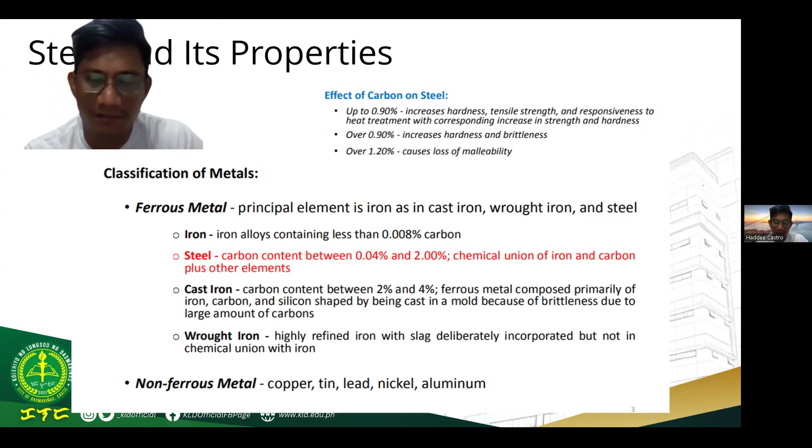As you can see from the first slide, steel design is governed by engineering principles that ensure structures can safely resist applied loads throughout the service life. These principles include understanding load behavior, material strength, failure modes, and safety factors.

As future engineers, we do not design structures to fail. Instead, we design them with sufficient margin so that even under extreme conditions, collapse is prevented.

So, production of steel. It has history too. Steel production involves processes such as blast furnace and electric arc furnace methods. These processes control the chemical composition and mechanical properties of steel. Understanding steel production helps engineers appreciate why different grades of steel behave differently and why specifications must be strictly followed in design and construction.

History of steel production: during 3000 BC, iron implements were used in Egypt. Then in 1000 BC, hardening iron weapons by heat treatment was known to the Greeks. It was used for weapons, like a blacksmith.

As iron ore and charcoal are heated in a forge or furnace, the ore is reduced to a sponge of metallic iron filled with slag composed of metallic impurities and charcoal ash. As the sponge of iron is removed from the furnace, still incandescent, it is beaten by heavy sledges to drive out the slag and to weld and consolidate the iron.

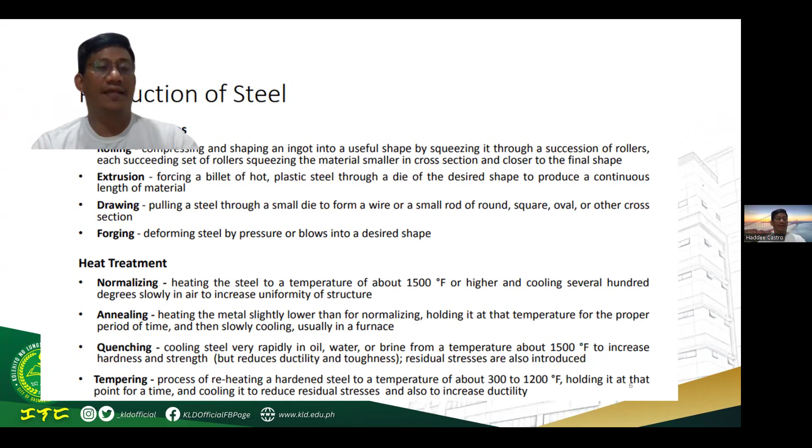There are many kinds of steel production. There's the finishing process, which includes rolling, extrusion, drawing, and forging. There's also heat treatment: normalizing, annealing, quenching, and tempering. These are self-explanatory.

Here are the mechanical properties of steel. Steel is an alloy primarily composed of iron and carbon, with other elements added to improve strength, ductility, and durability. One of steel's most important properties is high strength to weight ratio, which allows engineers to design lighter yet stronger structures.

Steel is very ductile, meaning it can undergo large deformations before failure. That's why we have what is called yielding strength. Once it goes beyond that, failure occurs. This is an essential property providing warning before collapse.

Property number one of steel is elasticity. It is the capability of the material to return to its original form after the loads are removed. We also have the modulus of elasticity of steel, which is the slope of the stress-strain diagram in the region where stress is proportional to strain.

Proportional limit is the stress at the limit of linear proportionality, generally determined by the stress corresponding to a permanent strain of 0.01%. When we say strain, from your strength of materials, strain is the ratio of the deformation over the original form.

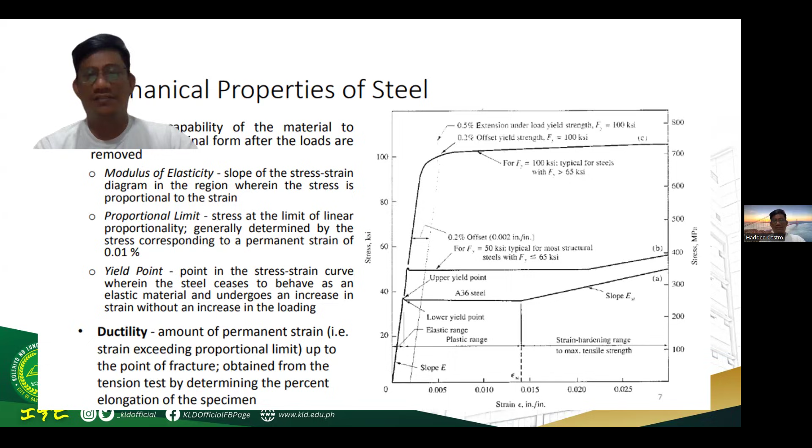The proportional limit should only have a stress limit of 0.01 for steel. Then ductility is the amount of permanent strain up to the point of fracture, obtained from the tension test by determining the percent elongation of the specimen. So there we see Fy and Fu, where Fu is the tensile strength.

There's also fatigue, which is the process of gradual or progressive fracture of the crystal under repeated stress. Then impact is the resistance of material to failure due to brittleness under service load. And then flow or creep is the very slow flow of material at elevated temperatures under sustained stresses.

And then there's corrosion and wear. This is the number one enemy of steel. It can be caused by moisture, water immersion, soil contact, electrolytic process, chemicals, and other factors besides water.

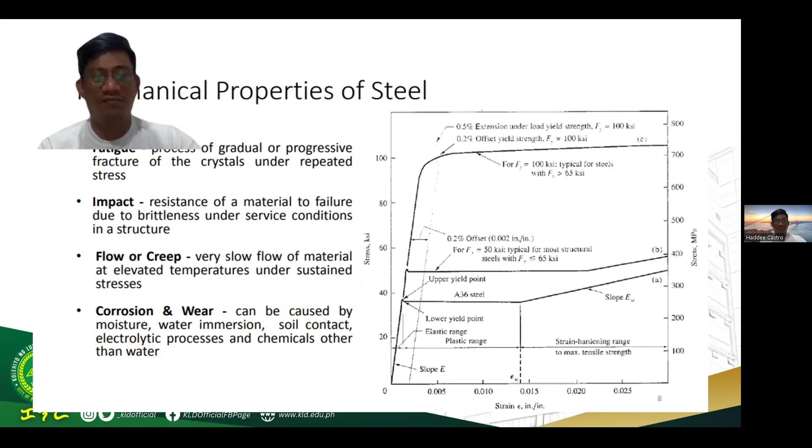This is the steel classification for structural use. Carbon steel has a yield strength of 32 to 55 KSI. These include A36, A53, A500, and so on.

We also have high strength low alloy steel, which is 40 to 70 KSI or 275 to 480 megapascal. These include A242, A441, A572, A588, or the grade 50 steels.

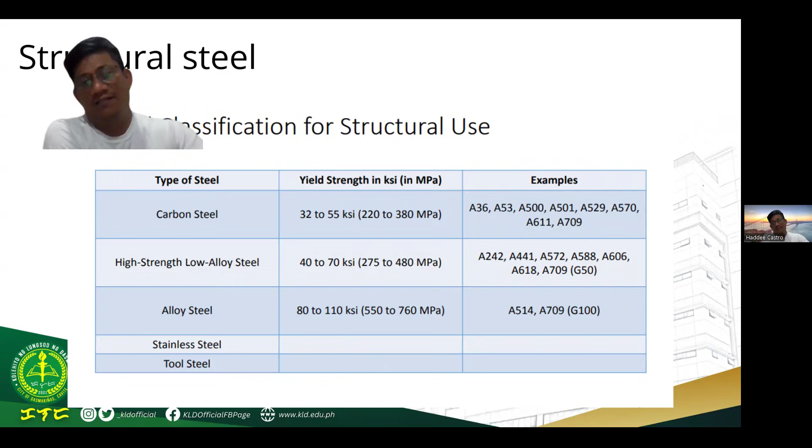And then alloy steel is 80 to 110 KSI, 550 to 760 megapascal. This is the grade 100. And then there's stainless steel and tool steel.

Same as the previous slide, this is the structural steel property, taken from ASTM.

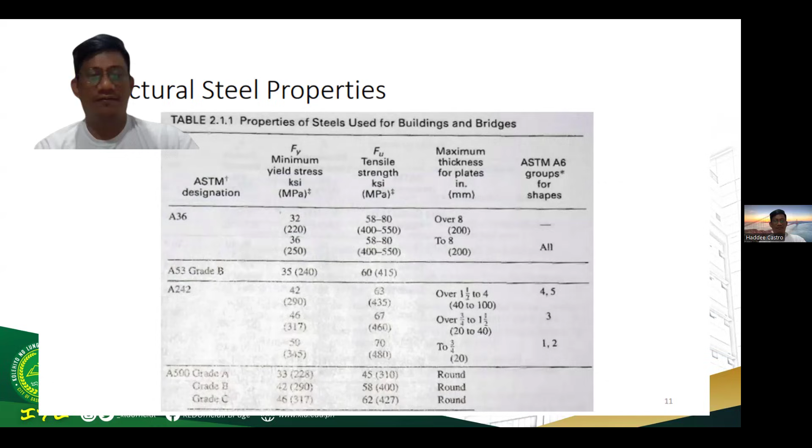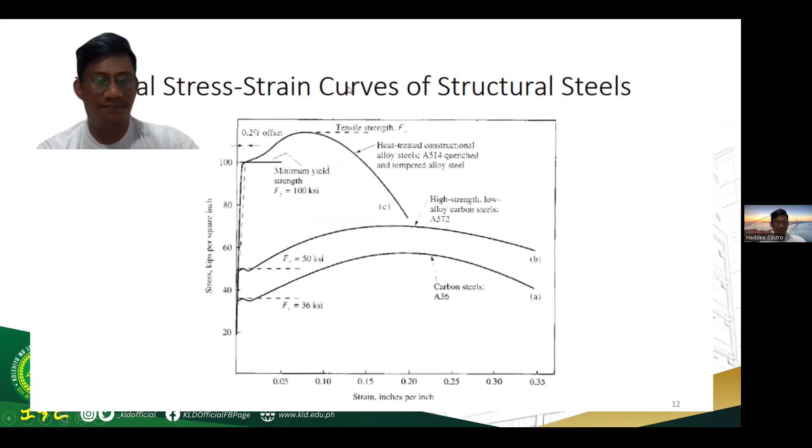And then the typical stress-strain curves of structural steel. As you can see, it has a minimum yield strength of 100 KSI.

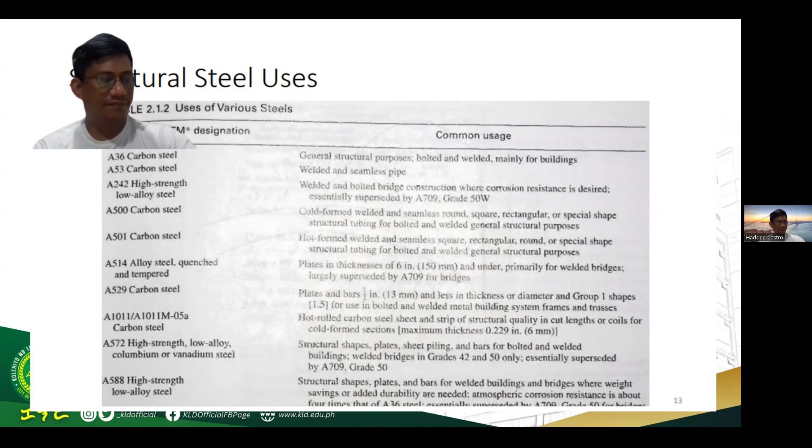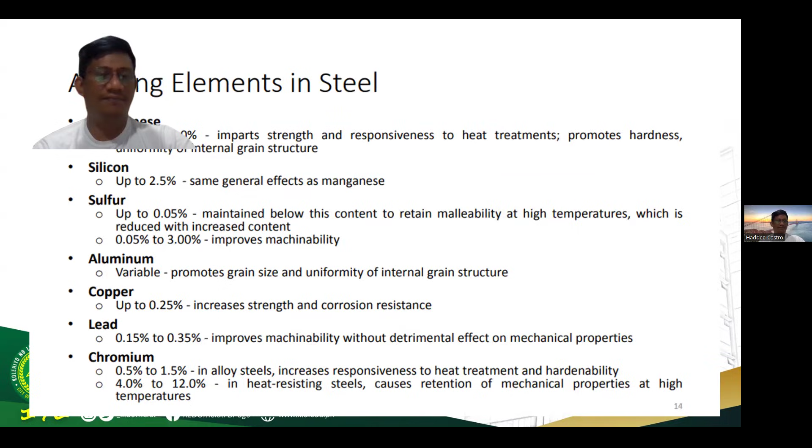Alloying elements in steel include manganese, silicon, sulfur, aluminum, copper, lead, and chromium.

Let us proceed now to the steel structure. When we say steel structure, it is an assembly of structural steel members connected together to support loads and maintain stability, similar to the definition of RC.

Because of steel's high strength, these structures often require less material than concrete or timber. Steel structures are commonly used in high-rise buildings, industrial plants, bridges, and long-span systems.

What are the advantages of steel structures? Steel structures offer several advantages, including faster construction time, high durability, and flexibility in architectural design.

And recyclability. However, these advantages can only be realized when steel structures are properly designed, fabricated, and erected according to engineering standards. The fabrication, design, and assembly must be done correctly for you to realize these advantages.

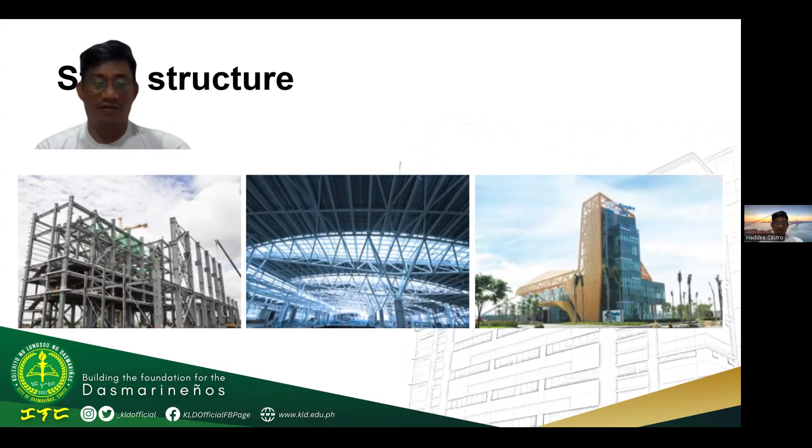As you can see, a metal structure is made of structural steel. Its components are connected with each other to carry loads and provide full rigidity. In modern construction, steel structures are used for almost every type of structure, especially high-rise buildings and industrial buildings.

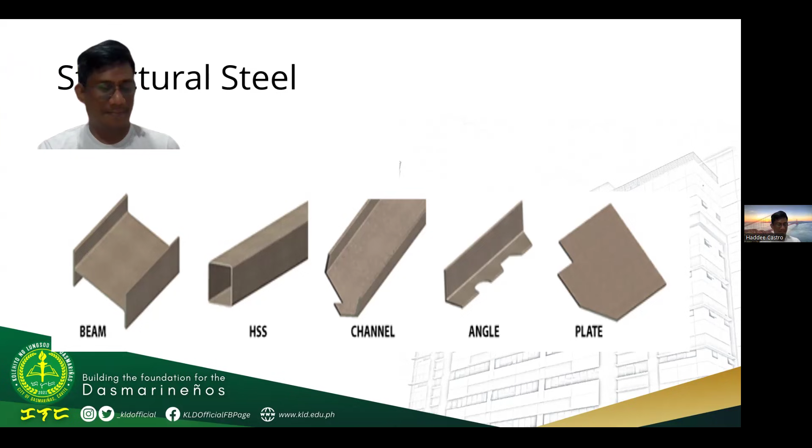Let's go one by one. Frame structures consist mainly of beams and columns connected together. Beams primarily resist bending, while columns resist axial loads and moments. Frame systems are commonly used in buildings because they provide flexibility in space planning and architectural design.

As for trusses, these are composed of straight members connected at joints forming triangular units. These members are designed to carry either tension or compression only. Trusses are efficient for long spans such as bridges and roof systems, commonly seen in roof systems and bridges, because they minimize bending and material usage.

For bridge structures, steel bridges may take the form of beam bridges, truss bridges, arch bridges, cable-stayed bridges, or suspension bridges. The selection of bridge type depends on the span length, loading conditions, construction method, and economic consideration.

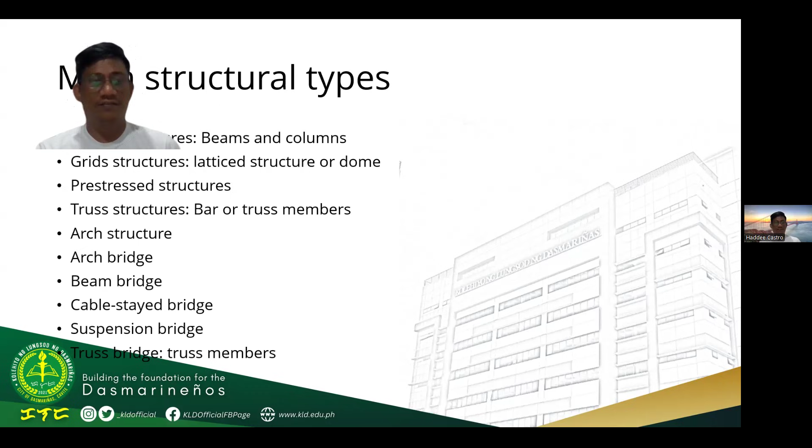Now let's move to steel design, just an overview. When we say design, this involves determining the member size and connection details that can safely resist the applied load. This process includes structural analysis, selection of appropriate sections, and verification of strength and stability according to design codes.

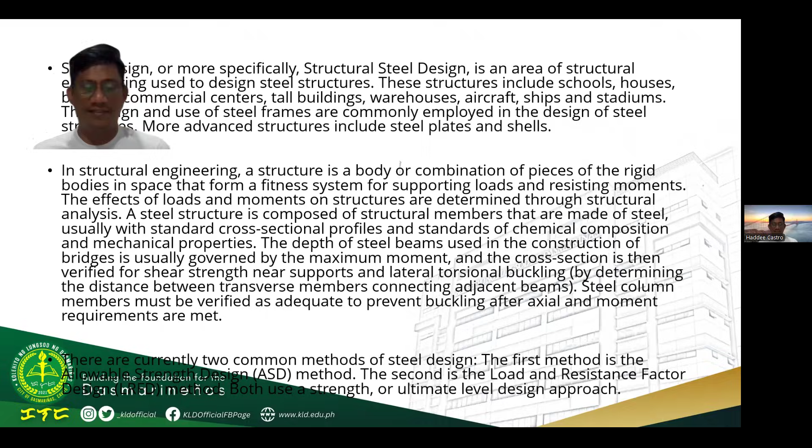Let's review. Simple stress review. Why are we reviewing stress? Because this is the basic equation used in most problems in this subject. Stress is equal to force over area, so the unit of stress is Newton per meter squared, or Pascal.

So, types of stresses: normal and shearing. Under normal stress, we have axial, tension or compression, and bearing stress. For normal stress, the resisting area is perpendicular to the direction of force. For shearing, the resisting area is parallel to the direction of force.

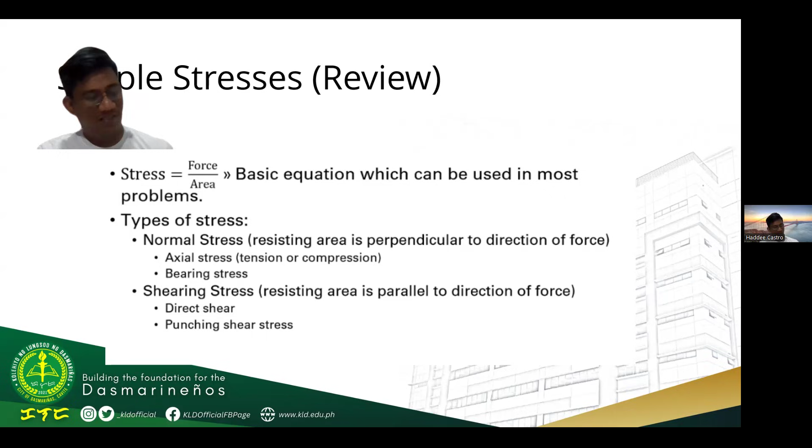Ngayon, i-discuss ito sabay. Sasama ko na yung code. Okay? Balik tayo ulit doon sa ASD tsaka LRFD.

Allowable stress design focuses on loads that exist at normal or typical condition. These loads are termed service loads which are unfactored. Take note, yung mga loads unfactored. They consist of dead, live, wind, and other loads expected to occur while the structure is in service. In ASD method, the structural element is designed so that elastic stresses produced by service load do not exceed some fraction of the specified minimum yield stress of the material.

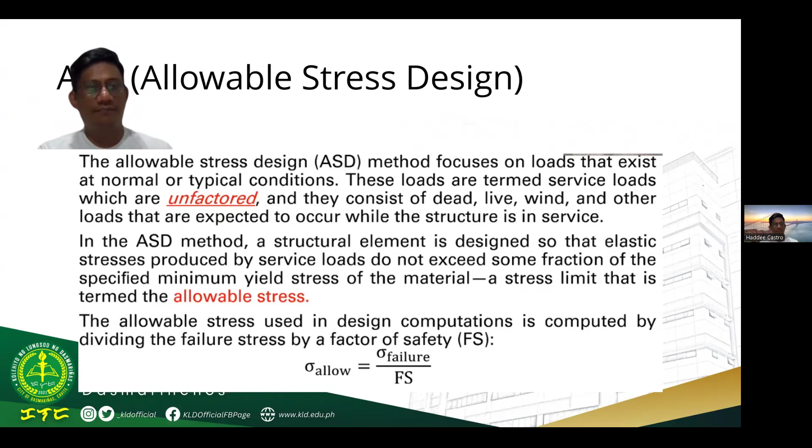Ang tawag dito ay allowable stress. Ang allowable stress used in design computation ay computed by dividing the failure stress by the factor of safety. So yun ang allowable stress. Hindi lang yung failure mismo yung compute mo, maglalagay ka ng allowance. Halimbawa, kung 100 yung failure stress ng isang bagay, kung may factor of safety ka ng 2, 50 lang. Huwag mo sasagarin, di ba? Ika nga, safety, factor of safety.

LRFD naman, second common design philosophy, load and resistance factor design. Ito ay widely used in design reinforced concrete, steel and wood structures. Loads that act on structures are inherently variable. To account for load variability, LRFD multiplies each load type by a specific load factor. Kaya nga tinawag na load and resistance factor design. Ang tawag na dito ngayon ay factored load. Yung mga external factor, minumultiplyan pa natin ng specific load factors. Commonly used by NSCP code ay 1.2 plus 1.6. Ang tawag na dito is factored load. 1.2 minumultiply sa dead load plus 1.6 ng live load. Okay, factored load. Tandaan doon sa ASD, unfactored.

Ano ba yung comparison ng dalawa? Although ASD and LRFD differ in approach, both are accepted by design codes. Engineers must understand both methods and apply them correctly depending on the project requirement and code provision.

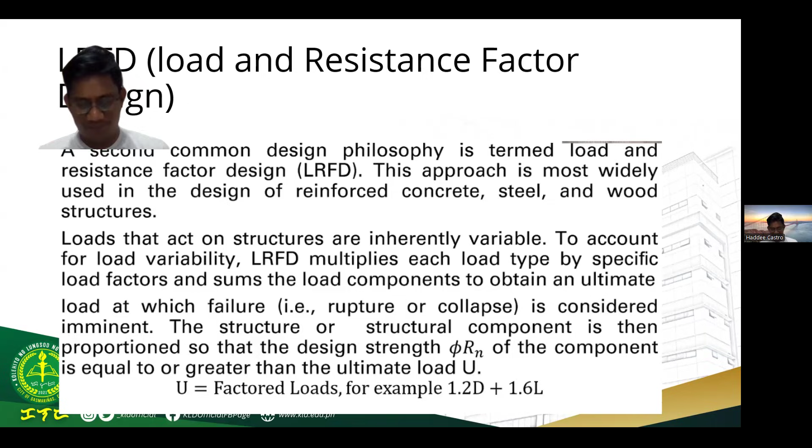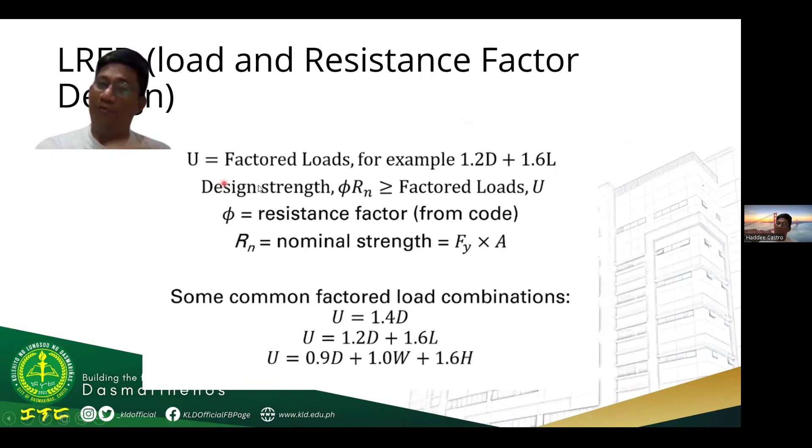Ito yung factored loads, for example commonly use 1.2 dead load plus 1.6 live load. Sa design strength niya, magiging Phi Rn, must be greater than or equal to factored loads U. Ito yung tinatawag na resistance factor, yung phi. Multiply pa natin from code yan, depende. From the strength of materials, Rn, nominal strength is the capacity, is equals to the stress times the resisting area. Sabi ko nga sa inyo, iikot lang tayo sa strength of materials formula. Minanipulate lang nila yon, nag-iba lang yung mga variable.

Bago tayo mag-proceed sa sample, NSCP code provisions for steel design. Ang National Structural Code of the Philippines ay nagbibigay ng rules and requirements for the safety design of steel members and connection. Compliance with the NSCP ensures uniform safety standards in structural design practice. Kaya mahalaga yung code. Steel connections are critical because they transfer force between members. NSCP provisions ensure that connections are strong enough to resist the applied loads without premature failure.

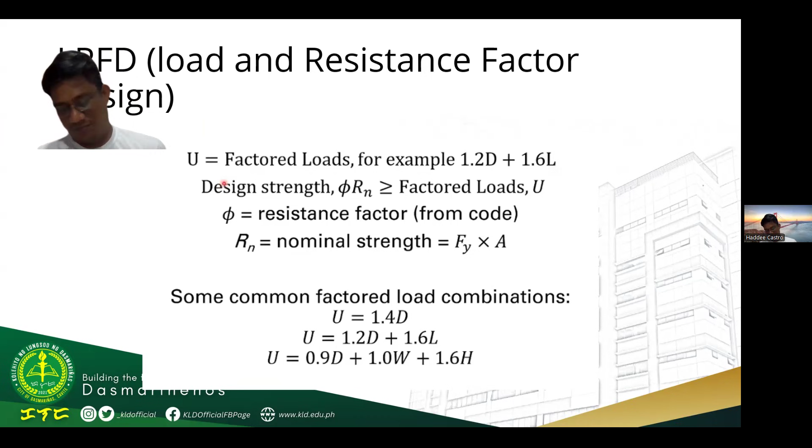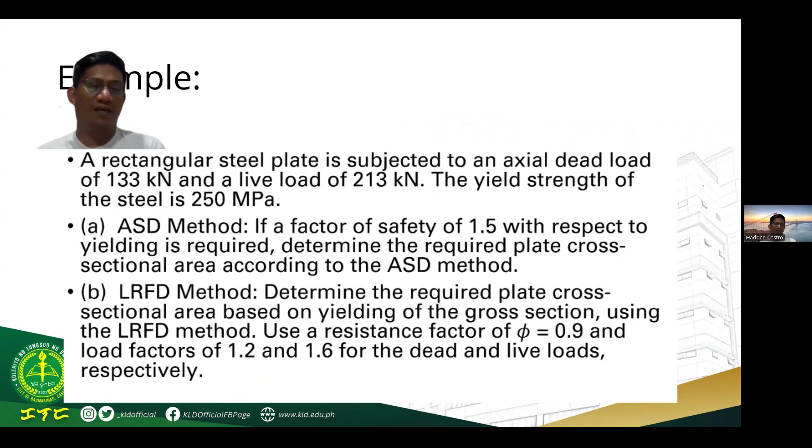Sample problem muna para mas maintindihan natin yung pagkakaiba ng ASD at saka LRFD. A rectangular steel plate is subjected to an axial dead load of 133 kilonewton and live load of 213 kilonewton. The yield strength of the steel is 250 megapascal. Letter A, using ASD method, if the factor of safety is 1.5 with respect to yielding is required, determine the required plate cross-section area according to the ASD method. By LRFD method naman, letter B, determine the required plate cross-section area based on yielding of the gross section using the LRFD method. Use resistance factor of Phi equals to 0.9 and load factors of 1.2 and 1.6 for the dead and live loads respectively.

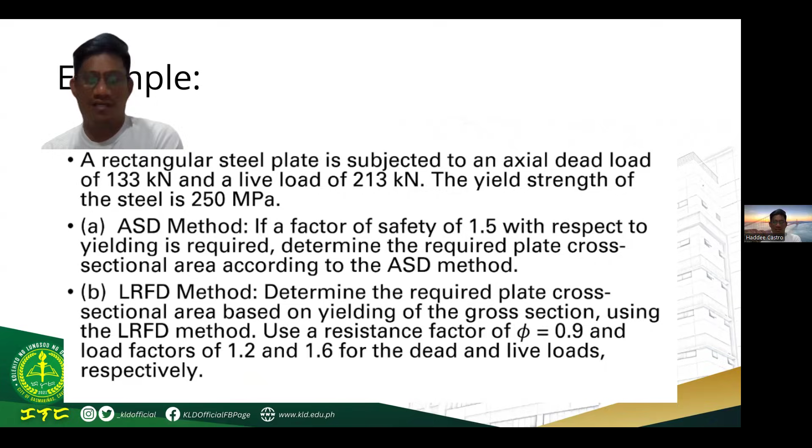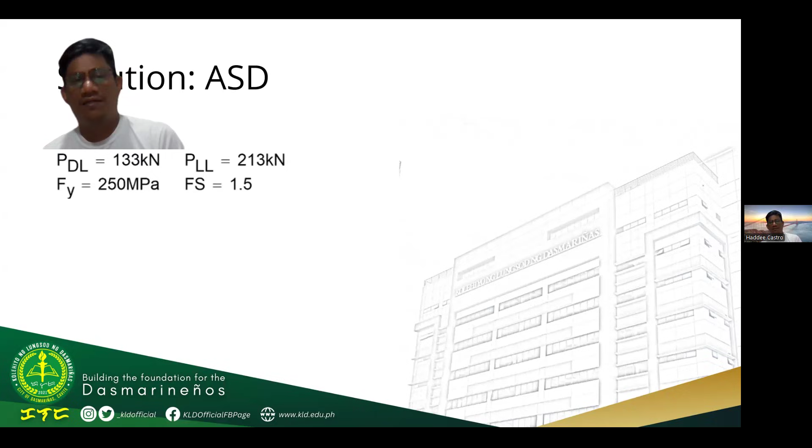Binigay na lahat ng mga parameters. Ayan na yung strength, yielding strength niya which is 250 megapascal. Given yung mga applied load, 133 kilonewton and 213 kilonewton. Gagamitin natin both ASD and LRFD to determine the required minimum cross-section area. Using ASD muna, given dead load 133, live load 213 kilonewton, yielding strength 250 megapascal, factor of safety is 1.5. First, kunin muna natin yung allowable strength, di ba?

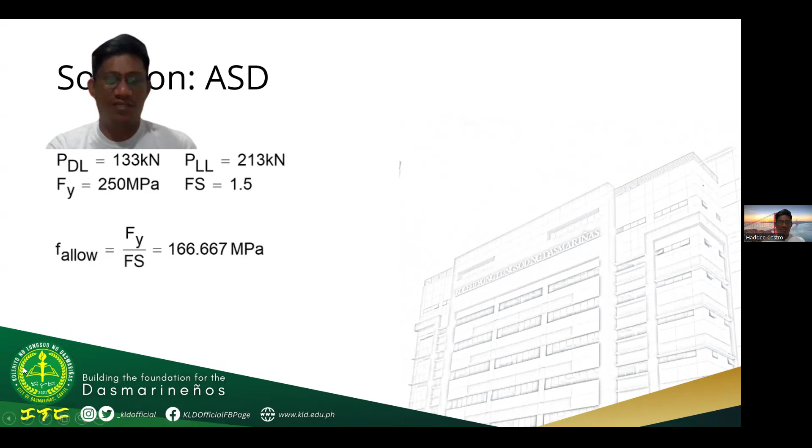Kung given is 250, sabi ko nga sa inyo, pag ASD, huwag natin sasagarin, di-divide natin siya ng factor of safety. Given naman yung factor of safety which is 1.5. So therefore, Fy over factor of safety is equals to 166.67 megapascal.

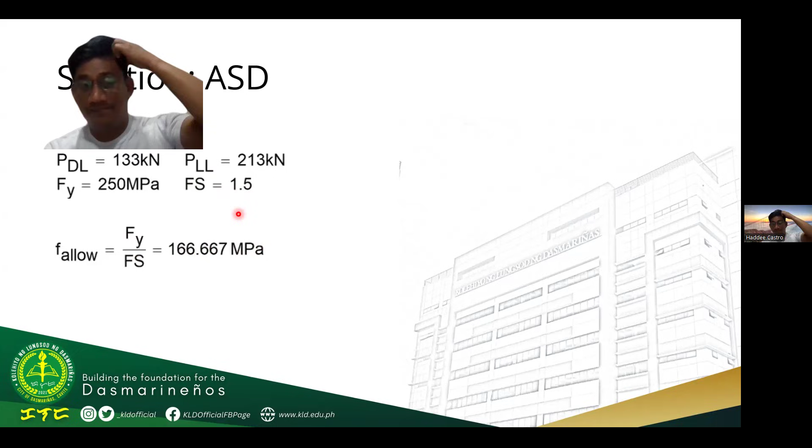So 166.67 megapascal lang gagamitin natin na yielding strength. And then equate na natin, kunin muna natin yung total load.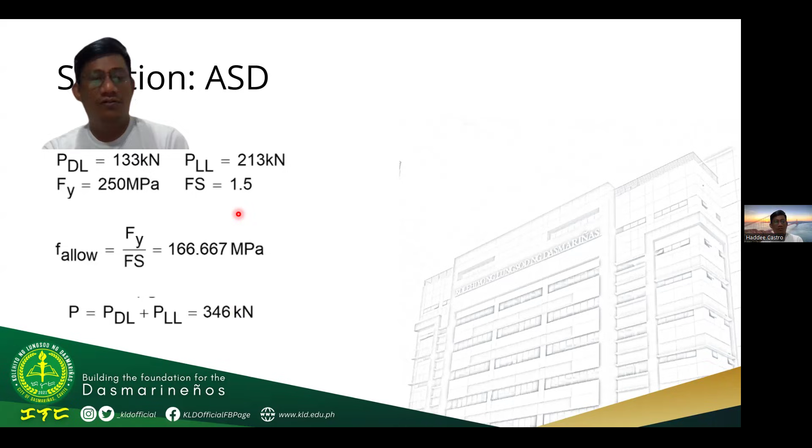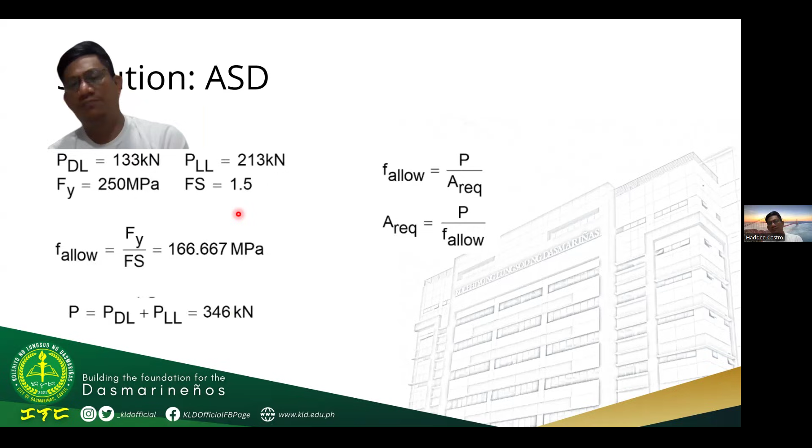So total load, sabi ko nga sa inyo, unfactored. Dapat pag ASD, unfactored, ha? So add mo lang yan. 133 kilonewton plus 213 kilonewton is equals to 346 kilo. And then, from the strength of materials formula, F allowable is equals to the force over the required minimum cross-section area.

Therefore, minimum cross-sectional area equals P over allowable strength. So convert natin kung megapascal, so ang unit niyan is Newton per millimeter squared. Tama, di ba? So kung nasa kilonewton to, convert natin siya ng Newton. Be consistent sa mga unit, guys, ha?

Marami nagkakamali dyan. Okay. 346,000 Newton over 166.67 megapascal. Therefore, the answer is 2,076 millimeters squared. O, take note, round up tayo pag required area. Hindi round down. Okay. Round up.

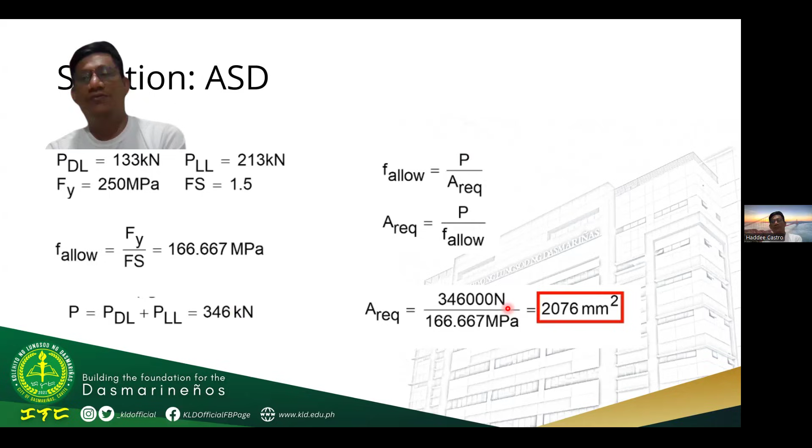Next, yan yung required, ASD ang ginamit. O, LRFD naman. So pag LRFD, once again, ito ulit yung mga given. Nag-iba lang, 0.9 naman yung phi. So pag LRFD, wala na ang factor of safety, but reduction factor of phi equals 0.9.

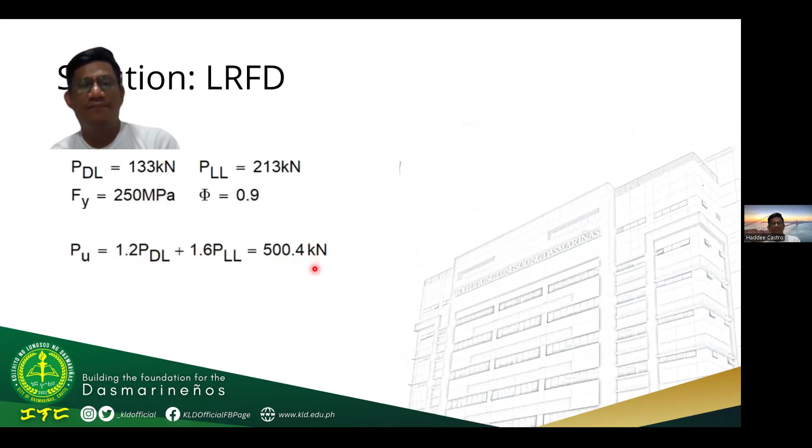Pero sabi dito, pag LRFD ang gagamitin mo, maglalagay tayo ng multiplier sa bawat axial load, di ba? So sa dead load, sabi dun sa problem, 1.2, tapos 1.6 naman sa live load. So this will be now the factored load, PU. So multiplying it by 1.2 and 1.6, so the answer will be 500.4 kilonewton. 1.2 times 133 kilonewton plus 1.6 times 213 equals 500.4 kilonewton.

And then from the formula of strength of materials ulit, manipulate nyo lang yan. Therefore, the capacity is equals to Fy times the required minimum area. Therefore, multiplying it by the reduction factor of 0.9. So magiging 0.9 Fy, area required is equals to PU.

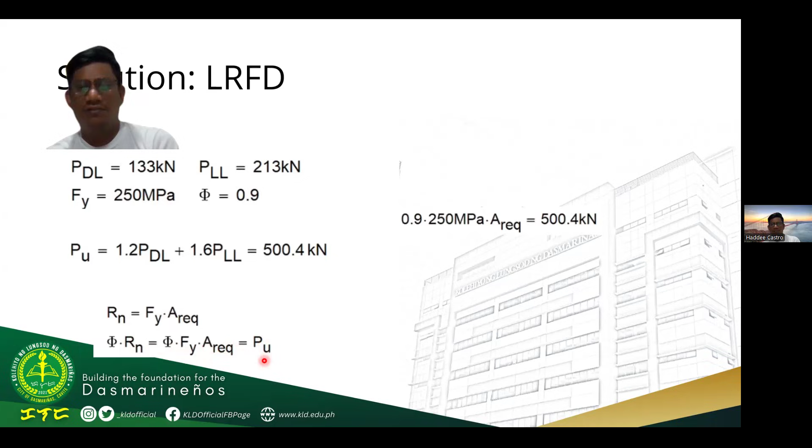Di ba sabi nga dapat greater than or equal, di ba? So PU na lang, equal na lang natin. So it is 0.9 times 250 megapascal, area required is equals to 500.4 kilonewton. So therefore the area required, convert ulit natin yung 500.4 kilonewton, magiging 500,400 Newton. Okay? So therefore the answer is 2,224 millimeters squared.

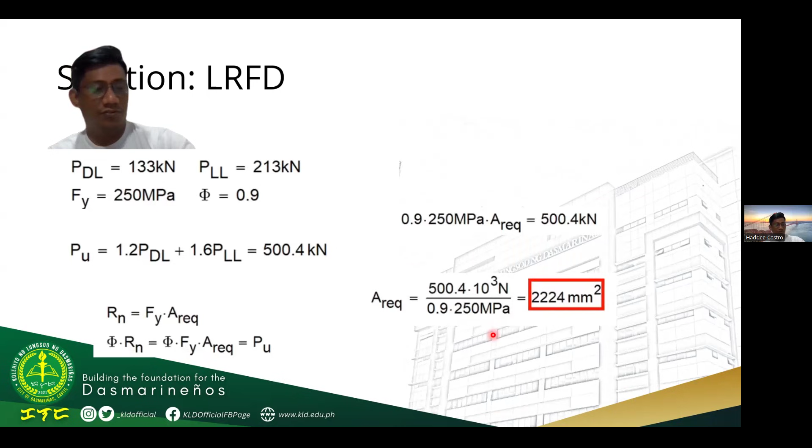Okay? Medyo malaking discrepancy, di ba, yung dalawa. Okay. So that is a simple stress problem using ASD and LRFD.

So NSCP code provisions applicable to steel connection. So sa steel design basis, the design strength and the allowable strength of connection should be determined in accordance with the provisions of this section. ASD, kapag over factor of safety, LRFD, reduction factor.

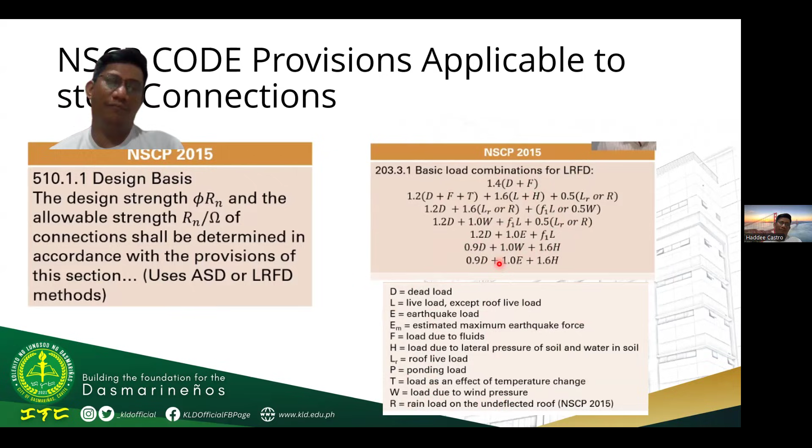So ito naman yung mga basic load combinations for LRFD. Okay, ayan na po lahat yung mga given parameters na yan. So focus lang tayo sa 1.2 plus 1.6, 1.2 dead load plus 1.6 live. Yun naman yung common. Kung titignan nyo doon sa ASD method, i-add lang na unfactored.

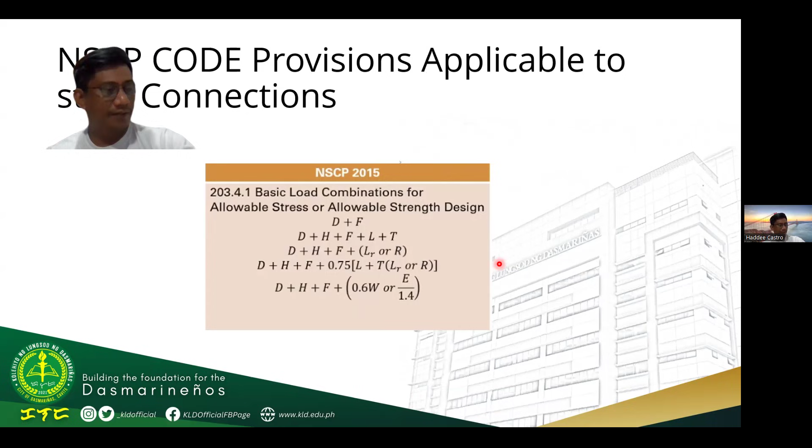So proceed naman tayo sa tension members. Okay, ito yung start na mismo ng discussion, tapos tayo sa introduction part ng steel design. So tension members, pag sinabing tension members, these are structural elements subjected to axial tensile force.

Okay, so examples include bracing members, tie rods, truss members. Proper designs ensure that fracture or yielding does not occur. So yan ang critical sa tension members, dapat hindi mag-fail sa tensile yielding tapos sa tensile rupture. Okay, kaya meron tayong dalawa. So focus lang muna tayo sa tension members, ha?

For tensile yielding, sasabay ko na yung sa code. So on gross section, Pn is equals to Fy times Ag. And then reduction factor is 0.9 for LRFD, and then factor of safety is 1.67 for ASD. Code yan, nasa code yan, so hindi mababago yan. For tensile rupture naman in the net section, ang formula is Pn equals to Fu times AE.

So where Phi, or the reduction factor, is 0.75 in LRFD, and 2 naman ang factor of safety for ASD. So ano ba yung mga parameters na yan? So isa-isa natin, effective net area. Effective, hindi lang basta net area, but effective net area yung AE. So meron niyang provisions from section 502.4.8 or 510.4.1 from 2015 NSCP code.

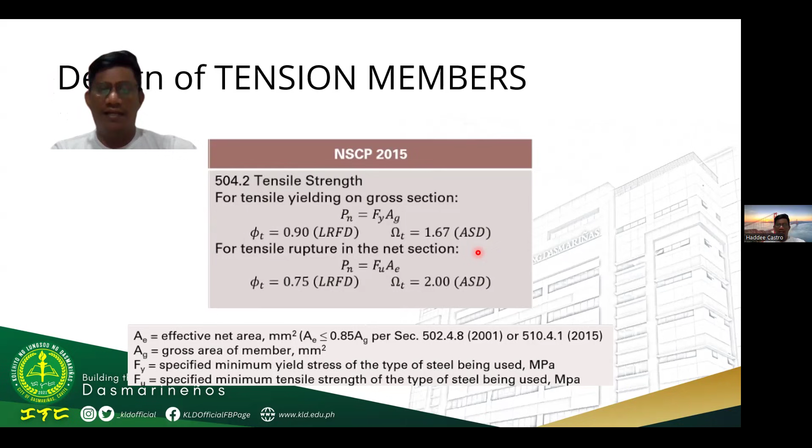So ano ba yung gross area and net area? Let me explain. The gross area is the total cross-sectional area of the member, yung resisting sa force na applied. Tandaan nyo, gross ibig sabihin total area lang.

And then the net area naman accounts for the material removed. For example, kung bolt connection yan, may butas, syempre tatanggalin mo yun due to bolt holes, di ba? So in tension members, net area often governs.

Bakit yun ang mostly nag-govern yung net area? Kasi binawasan mo na yung area, so lumiit na yung capacity niya. Ganun naman lagi, habang binabawasan mo yung area, lilit yung capacity.

Sabi nga dito, failure occurs at the weakest section. So net and gross area, NSCP.

In computing the net area for tension and shear, for example bolt hole, bolt connection muna. Yung bolt hole should be taken 2mm greater than the nominal dimension of the hole. Ibig sabihin, kung ang diameter ng bolt hole is 10, dadagdagan mo lang ng 2mm.

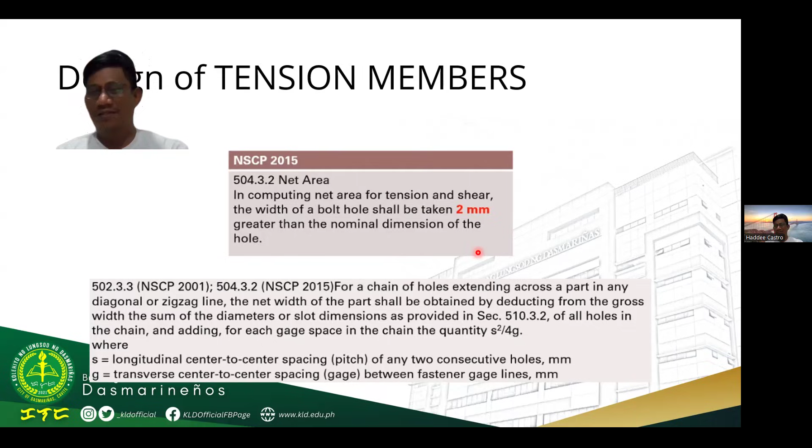Itong NSCP provision na to, ginagamit lang kapag staggered yung connection ng hole. Pag sinabi kasing staggered, ganito. Oh wait, bago tayo pumunta doon sa staggered, ito muna yung pagkakaiba ng net area sa gross area.

For example, ito yung tension load or applied load, ito yung plate. So yung gross, pag kinuha mo yung cross-section, ito yun - yung thickness lang niya, tsaka yung width nitong plate. And then yung net area, babawasan mo rin yung diameter ng bolt hole, so plus 2, sabi sa provision.

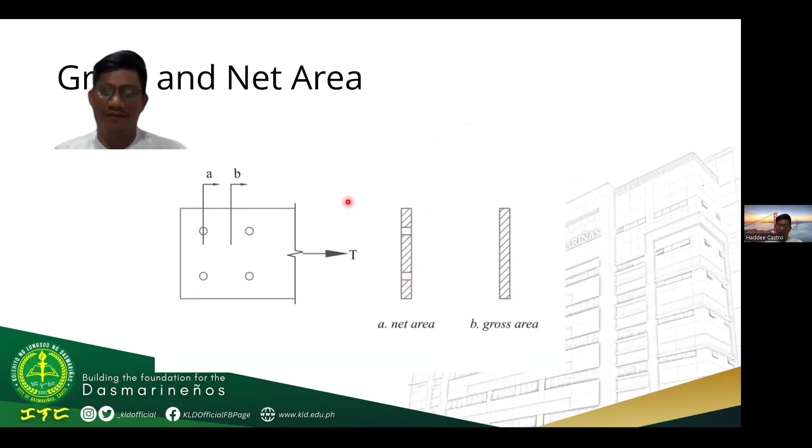Ito naman yung kanina, mahaba na kapag yung connection ng bolts is staggered. Sabi nga may zigzag, so madali lang naman yan. For example, ito yung width.

For example, ito yung gross width, makita yung - ito, di ba, ito. Yan yung WG, gross width. Kaya nga yung net width is equals to WG minus summation of the bolt hole diameter. So for example dito sa drawing nito, dalawa yan, isa, dalawa, di ba, ayun yung failure eh.

And then may isa siyang staggered, zigzag siya, so S squared over 4G where S is the pitch and G is the gauge. Ayun naman, given na rito. Ito, hindi makita yung cursor. Ayan, ito yung G, ito yung S, center to center yan ha.

So therefore, we can now compute for the net area after mong masolve yung width net or net width. So net width times the thickness of the plate.

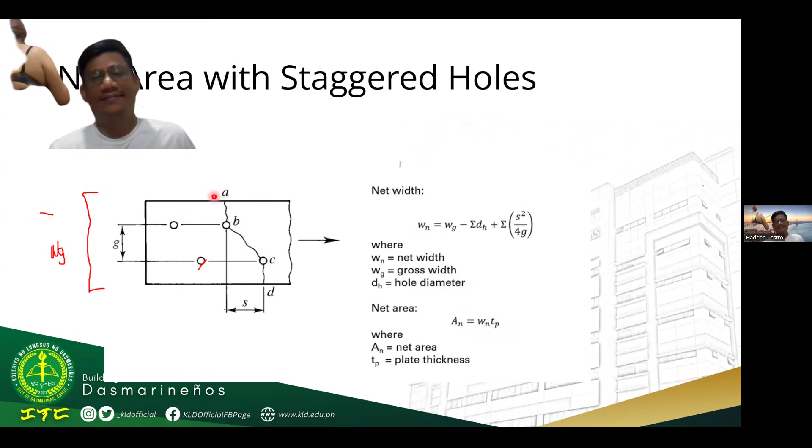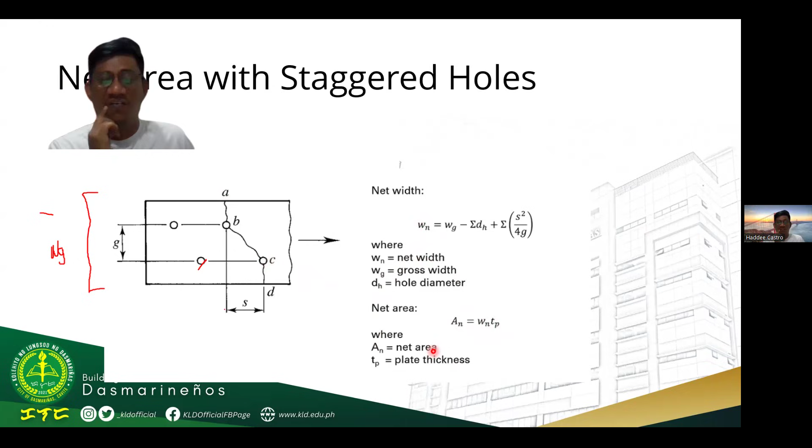Okay, yan yung stagger. So hindi pa yan yung effect, net area lang yan, AN. Pero kailangan, di ba sabi sa provision, AE - so kailangan i-compare mo pa yan doon sa 0.85 ng gross area. Tandaan nyo na sa provision nyo, ibig sabihin lang kung ano yung mas mababa doon sa dalawa.

And to get the effective net area, meron pa tayong multiplier na U, where U is the shear lag factor - nasa provision pa rin to. Since bolted connection naman muna ang pinag-uusapan natin, yung U lang naman is equals to 1, so 1 times AN is equals to AE. Pero you must compare it muna sa 0.85 AG, ha, patandaan. Iba naman kasi for welded connection pa, so later on pa natin i-discuss yan. Focus muna tayo dito sa bolted connection.

So to further understand, let's try an example. Okay, let's try an example.

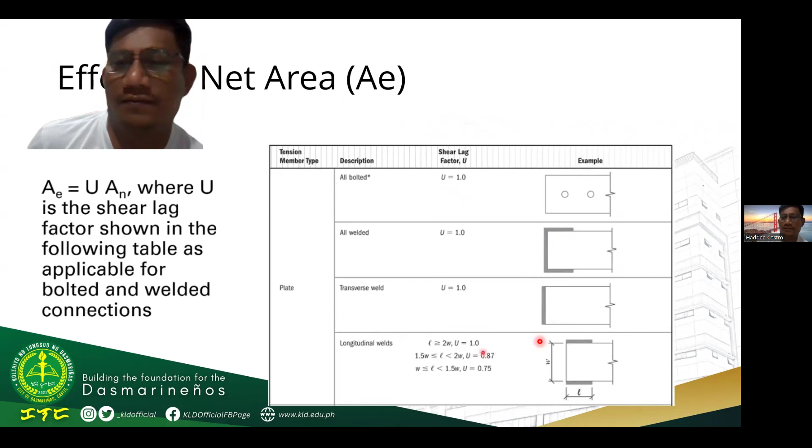So, a 20 millimeter thick plate, Fy is 250 megapascal, and Fu is 415 megapascal. It has 20 millimeter nominal bolt holes. So, using ASD and LRFD, NSCP 2015, the following apply.

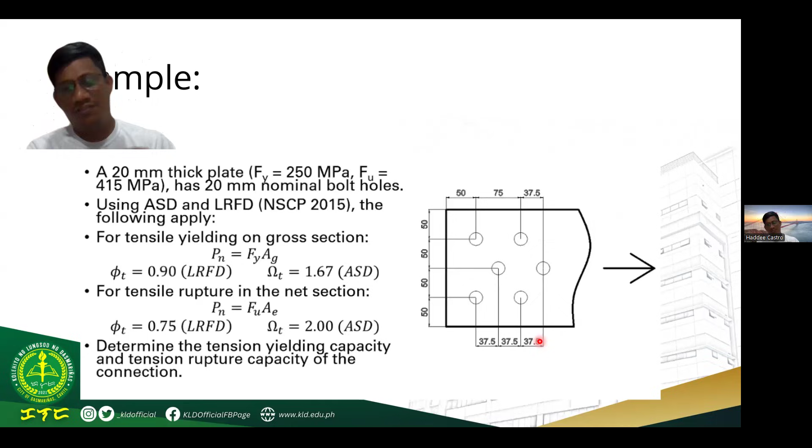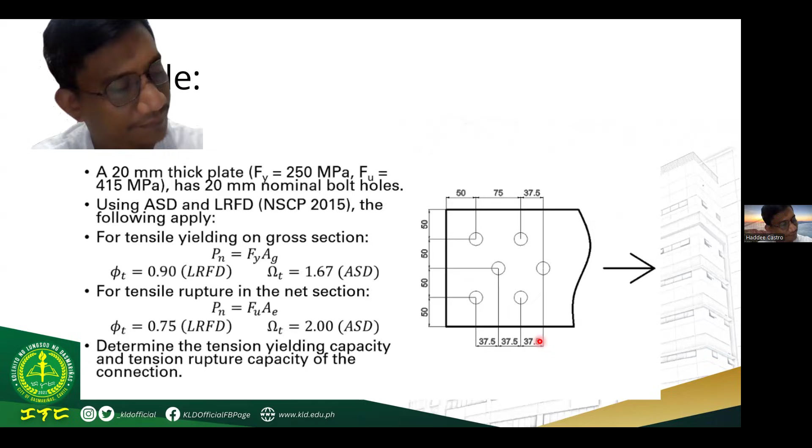Tension yielding is the easiest since we only need the gross area. So let's try to solve it one at a time using ASD and LRFD. Solution: determine the tension yielding capacity.

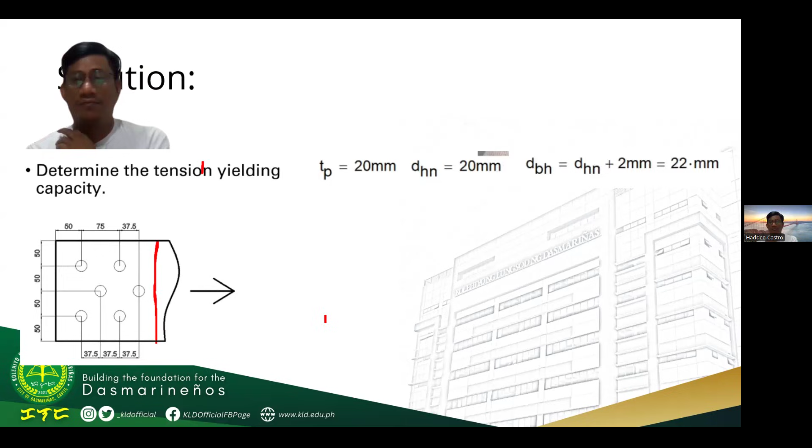Tension yielding capacity. According to the code, the bolt hole diameter must be plus 2. So the diameter of the bolt hole is 20 as given, but per the provision we need plus 2 more. So 22 - take note, plus 2. Okay guys, plus 2, so we'll use 22.

So Wg, or the gross width - gross width is 200 millimeters. Why 200 millimeters? It's different from the figure: 50 plus 50 plus 50 plus 50 millimeters equals 200 millimeters. So we'll use Fy, the yielding strength, 250 megapascal.

So therefore, the gross area is gross width times the thickness of the plate. So, 4,000. Therefore, Pn is equal to Fy times Ag.

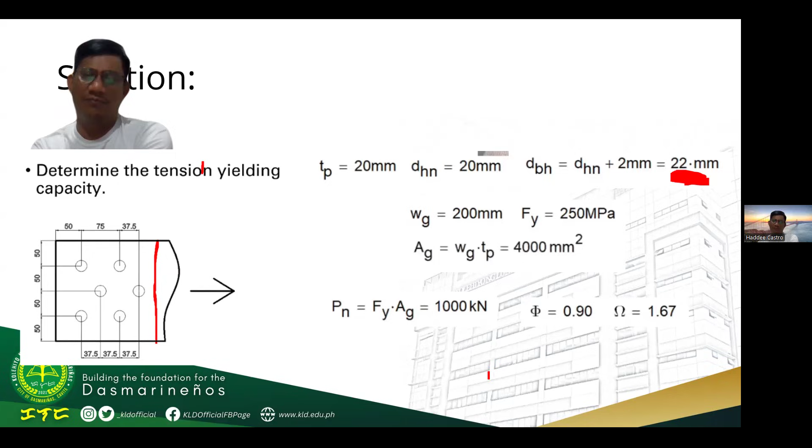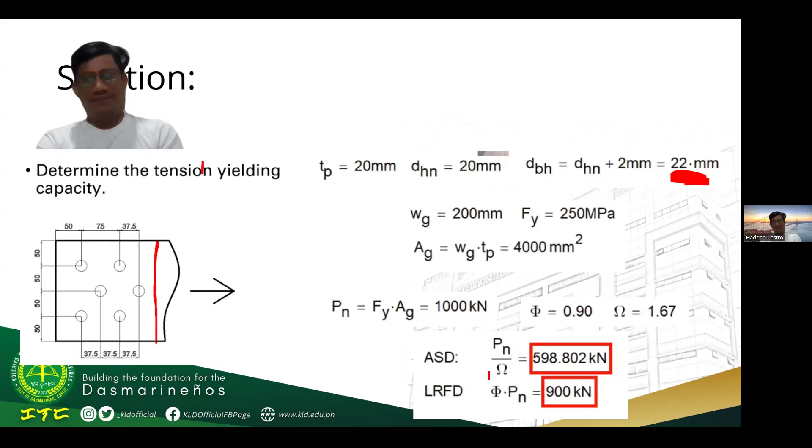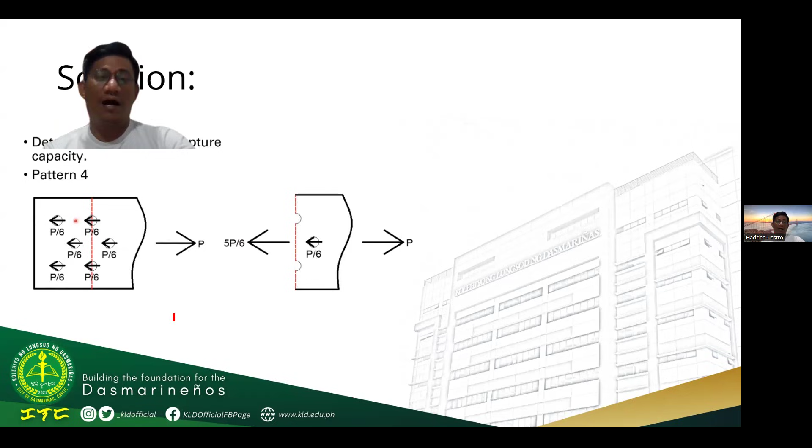So there are 4 failure patterns there. We need to check each one, from pattern 1 to the last. Let's start with pattern 1 for tension rupture, because of the orientation of the bolt hole. So for pattern 1, let's determine the tension rupture capacity.

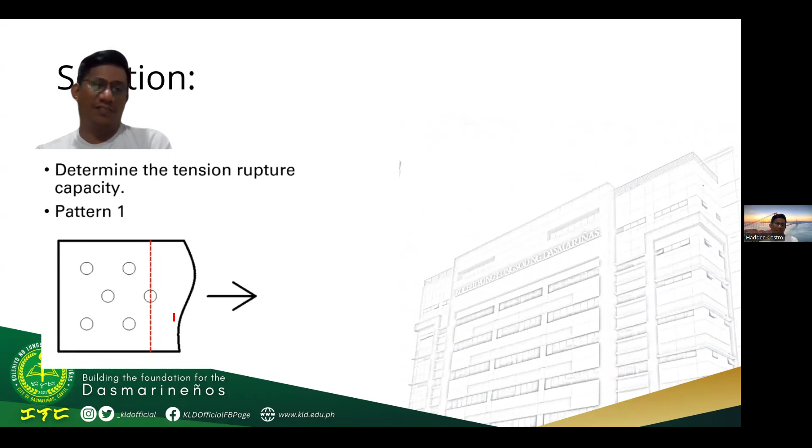Given parameters: effective bolt hole diameter is 22 mm, thickness of the plate is 20, and gross width is 200. But this time we will use tensile strength, not the yielding strength - 415 MPa. So let's solve for the net area.

For net area, we still need the gross area first - I'll explain later, let's go back. So net width equals gross width minus the bolt hole diameter. Since only one bolt is affected in pattern 1, we subtract just 1: 200 minus 22. So the net area is 3,560 mm squared.

According to the provision, we must compare it to 0.85 Ag. Since our case here is 1, that's still the effective net area, but it's not yet the total, truly effective net area. So let's compare it to 0.85 Ag. But 0.85 Ag is 3,400... per the provision, the net area should not exceed that - it's an inequality, must be less than or equal. If it exceeds, then use the 0.85 value - that's the effective net area. It's the minimum of the two.

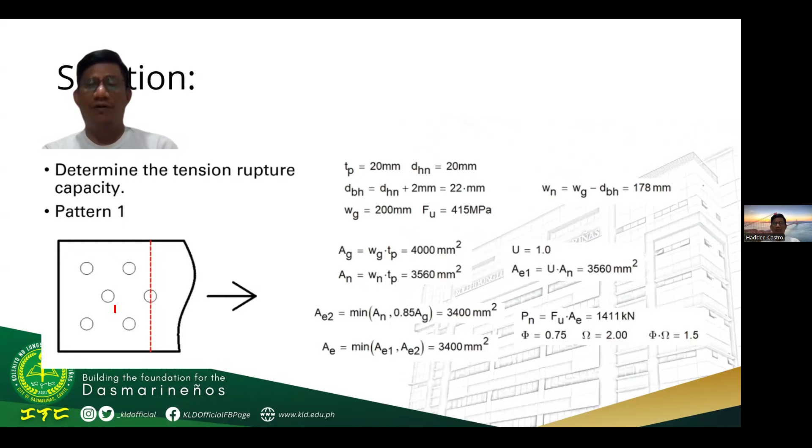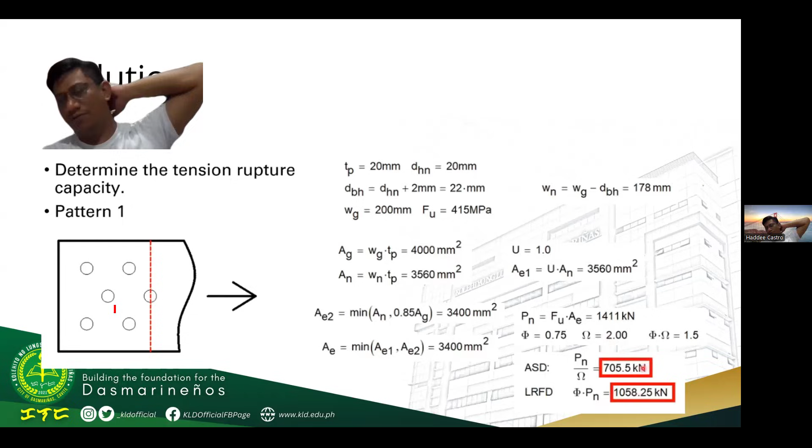Noted, okay? So therefore, 3,400 is our An, our Ae. Now computing for the capacity: Fu times Ae will give us 1,411 kilonewton. Factor of safety is 2, and reduction factor is 0.75 based on the provision. So therefore, that is the answer: for ASD, 705.5 kilonewton, and for LRFD, 1,058.25 kilonewton.

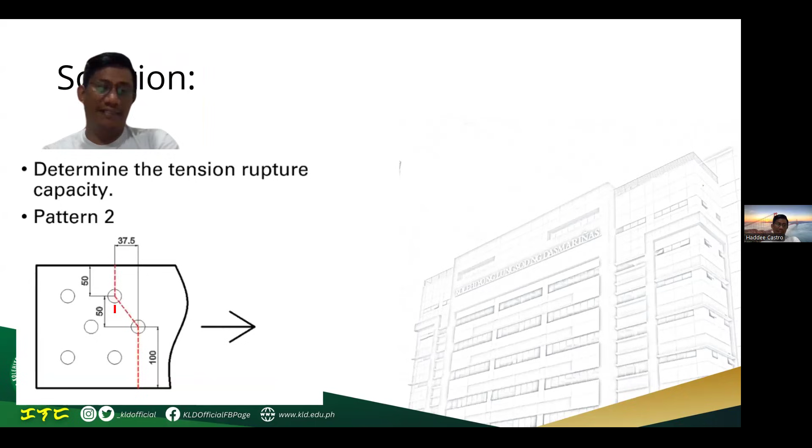Next, for pattern number 2, nagkaroon na siya ng isang staggered connection. So ilan na yung bolt hole na babawas natin? So 2. Ganun pa rin yung step-by-step procedure niya, yung approach, pero magkakaroon na siya ng plus S squared over 4D. So gross width minus 2 bolt hole diameter plus S squared over 4D. Yung S natin is 37.5, G natin is 50. So therefore, the answer is 3,260.625 mm squared. And then multiplying it by shear lag factor, the same.

So therefore, compare natin ulit sa 0.85 Ag, which is 3,400 mm squared. So therefore, the effective net area is 3,260.625 mm squared. And then computing for the capacity, Fu times Ae will give us 1,353.16 kilonewton. And then divide mo sa factor of safety for ASD and multiply by phi 0.75 for LRFD. Therefore, the answer is 676.58 kilonewton and 1,014.87 kilonewton.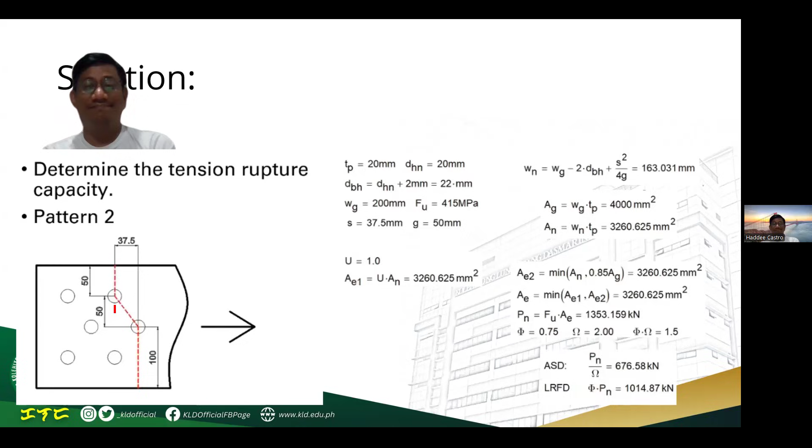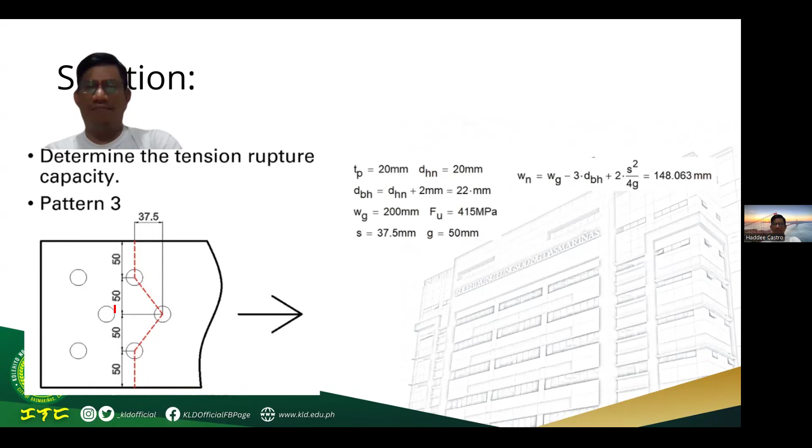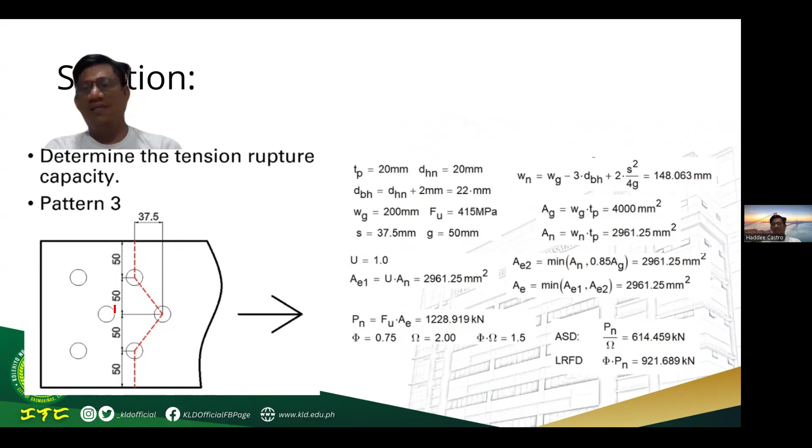Okay, and then multiplying it by the thickness of the plate will give us 2,961.25 millimeters squared. And then multiplying it by the shear lag factor 1, effective net area is 2,961.25 millimeters squared. I-compare ulit natin based sa provision to 0.85 AG. So therefore, AE is 2,961.25 mm squared. So using the formula once again for tension rupture, FU times AE is equals to 1,228.92 kilonewton. Divided by factor of safety of 2 will give us ASD 614.45 kilonewton. And for LRFD, multiplying it by 0.75 will give us 921.68 kilonewton.

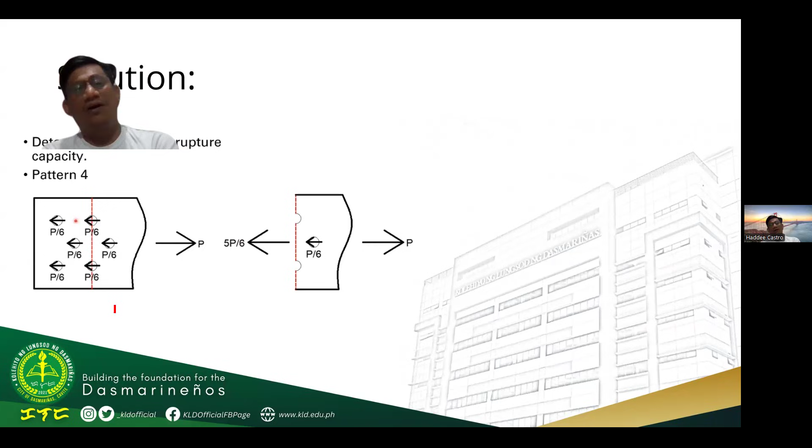And then this, kaya kailangan mo pa rin i-analyze, pero more likely hindi man mag-occur, pero kailangan mo pa rin i-analyze. Baka, kaya nga, para sure.

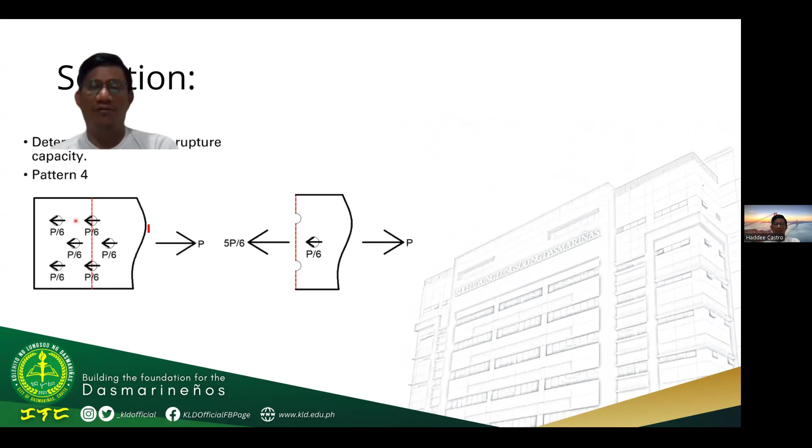So pattern 4, may iwan isang bolt. So therefore, in drawing the FBD, 5 out of 6 na lang ng P dito sa kaliwa. Tama, kasi 6 yung holes na nagre-resist doon, 6 na bolt. So 5 out of 6 na lang yung capacity niya ng P. Sa kabila, ganun pa rin naman yan. Since wala na namang staggered connection, so ma-minus natin 2 bolt hole. Will give us 156 mm.

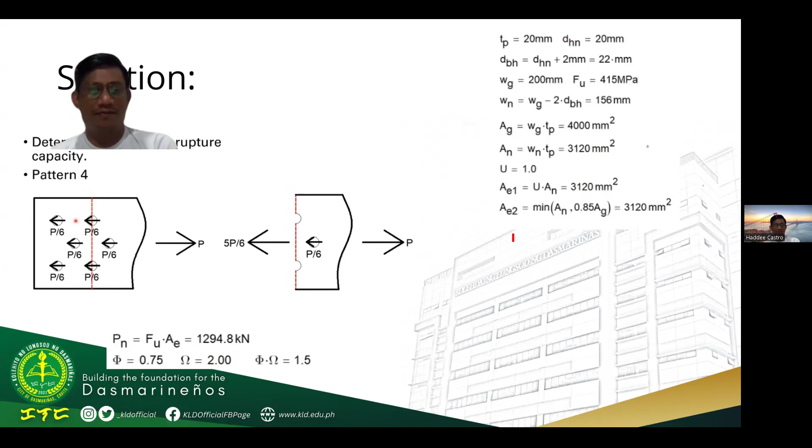So therefore, AE1 is 3,120 millimeters squared. Then i-compare natin sa 0.85 AG, which is 3,400, therefore 3,120 millimeters squared will govern. And then FU times AE ulit, 1,294.8 kilonewton. For ASD, 647.4 kilonewton. But hindi pa yan yung final answer. Sabi nga doon sa FBD, 5 out of 6 na lang ng P. So kukunin mo yung 5 out of 6 doon. Divide mo sa 5 over 6 or multiply by 6 over 5 will give us a capacity of 776.88 kilonewton. Mas lumaki siya, di ba? Kasi may katulong pa kasing isang bolt doon.

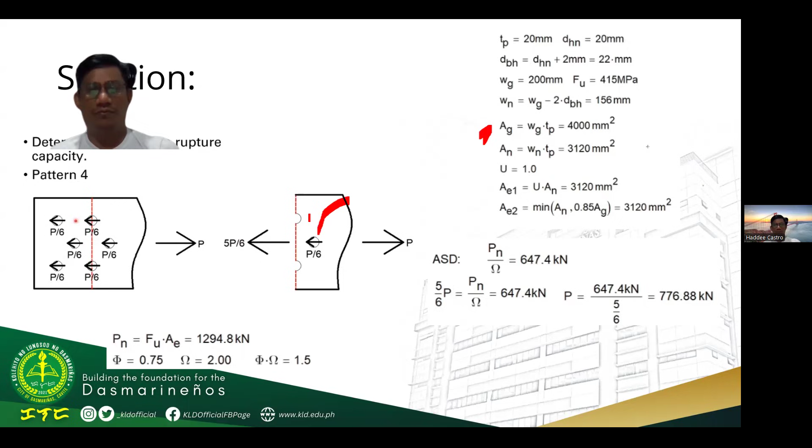May katulong na isa pang bolt. So ganun din sa LRFD. Multiply naman ng phi will give us 971.1 kilonewton. But hindi pa yung final answer, divide mo ng 5 over 6. So it is 1,165.32 kilonewton ang capacity.

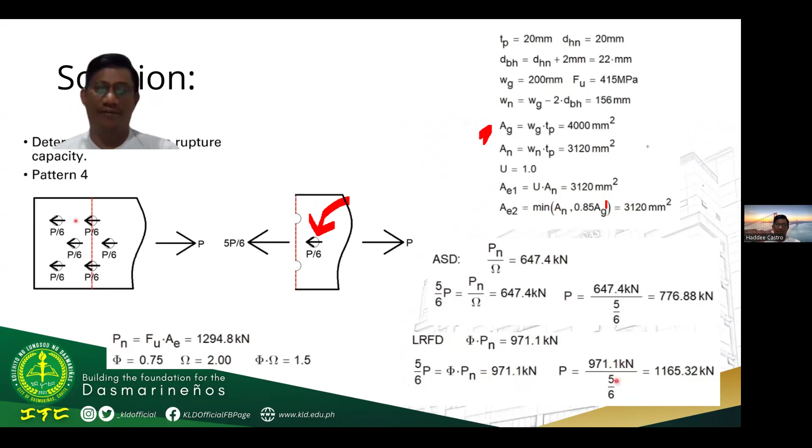Okay, so natapos mo na lahat yung pattern and then i-summarize mo lang. Summary of capacity for ASD. For pattern 1, 705.5 kilonewton. Pattern 2, 676.58 kilonewton. 614 naman sa pattern 3, then 776. So syempre, ano mag-govern dyan sa apat na yan? Siyempre, pag capacity na pinag-uusapan, yung pinakamaliit, ibig sabihin hanggang dito lang yung capacity niya. Kasi pag lumampas, magpe-fail na siya doon sa pattern 3. Hindi 776 ang sagot. Take note of that. Pag capacity, the smallest governs.

Okay, pero kanina, sabi ko, di ba, pag ang hinahanap is area or the width or the cross-section area, round up, lakihan nyo para mas safe.

And then for the LRFD, the summary of the capacities. Pattern 1, 1,058.25 kilonewton. For pattern 2, 1,014.87 kilonewton. Pattern 3, 921.69 kilonewton. And pattern 4, 1,165.32 kilonewton. So the smallest capacity again governs. So the answer is P equals to 921.69 kilonewton.